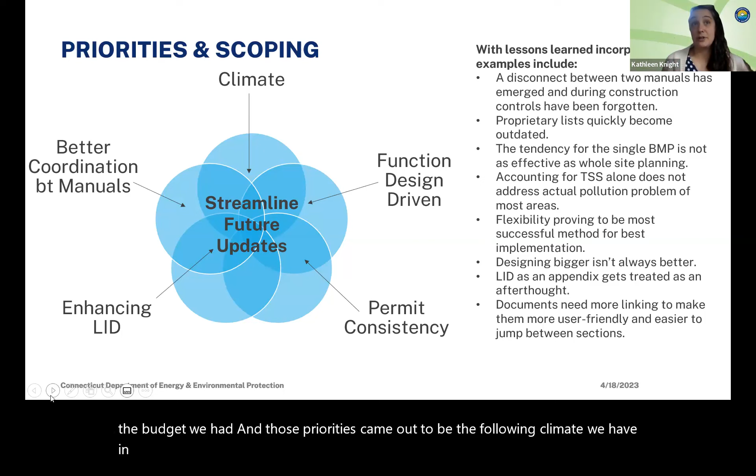Climate. We have it twofold. We have observed climate change since the numbers that were in the manuals, which were from as far back as the 70s, and the values now are very different.

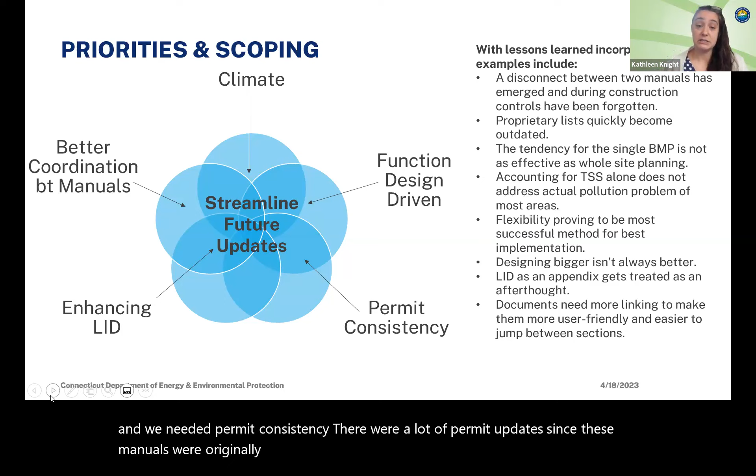Rather than highlight primary and secondary BMPs, we really wanted a function-driven focus. And we needed permit consistency. There were a lot of permit updates since these manuals were originally written that needed to be brought up to date in these guidance documents.

We also wanted to enhance LID. This is a requirement of the permits and also just a very good, useful practice. And it was kind of an afterthought as an appendix.

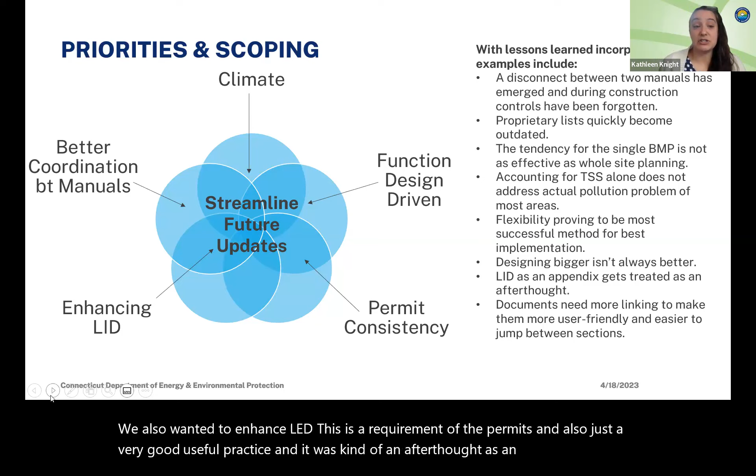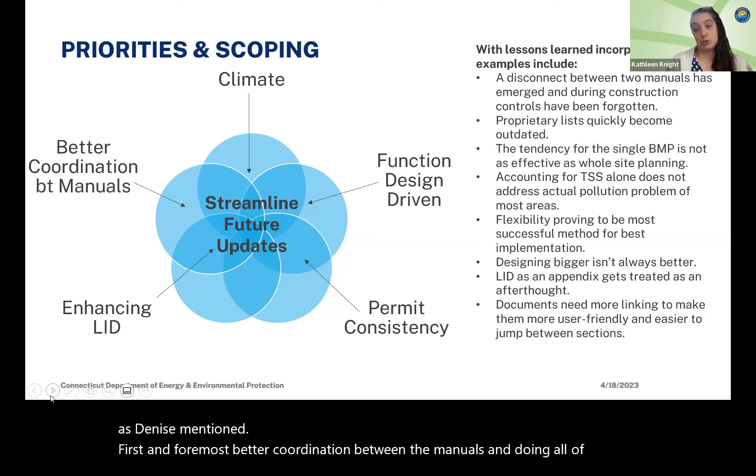And then, as Denise mentioned, first and foremost, better coordination between the manuals. And doing all of these priorities in a way that streamlined future updates. We didn't want to produce something that was an exhaustive list that took forever to put together and then immediately was outdated. We wanted to provide longevity to the manual, and by doing so, bring flexibility in design.

So that way you could always incorporate the newest science and the newest technologies. And we didn't want to lose sight of where these priorities came from, and that came from this kind of summarized list of our lessons learned. As Denise said, there was a disconnect, and we had started to see some forgetting of during-construction controls. There was a lot of concern about proprietary lists. They get really quickly outdated.

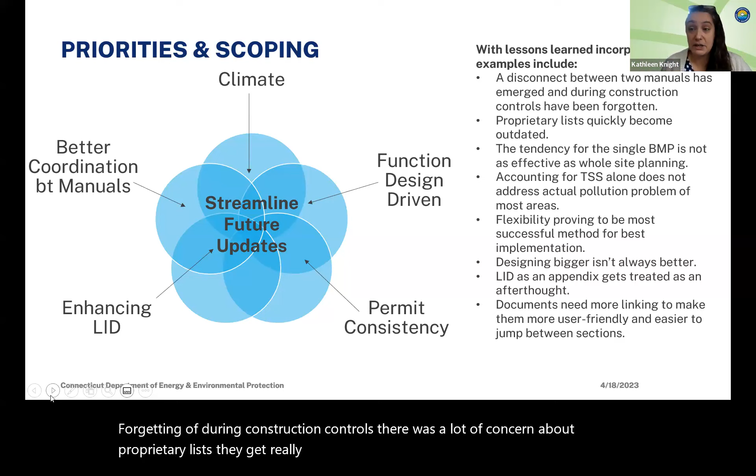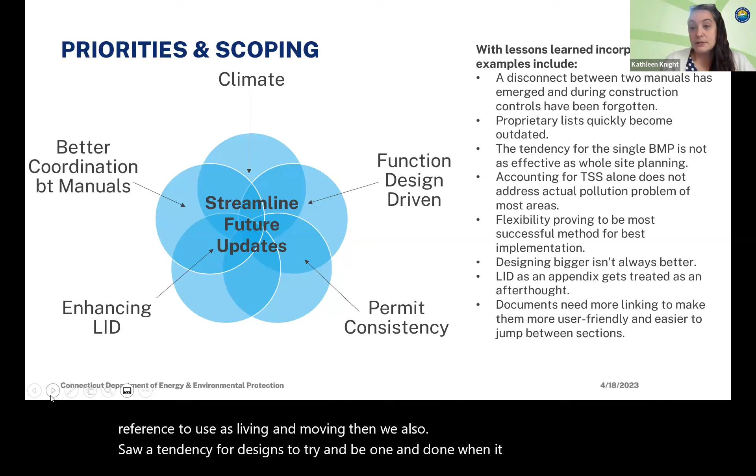So we're not going to manage one of those. We're just going to take the function and what serves best, and we've provided some links to those sources that do routinely update these kind of lists. That way you have a reference to use that's living and moving. Then we also saw a tendency for designs to try and be one-and-done when it didn't really suit the site, so we were trying to refocus the design process as whole site health.

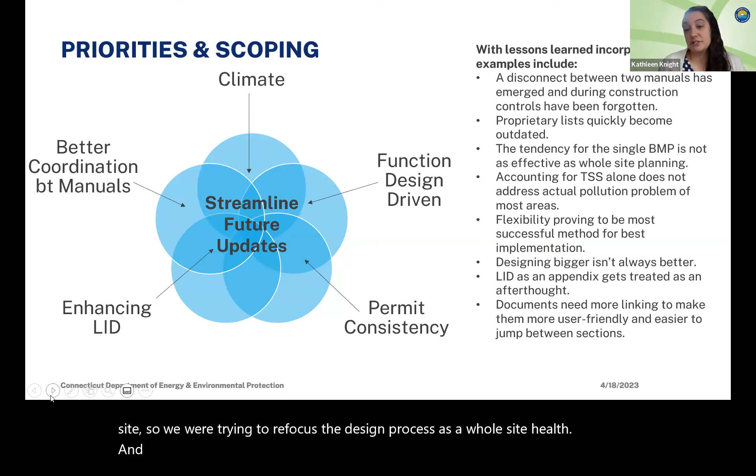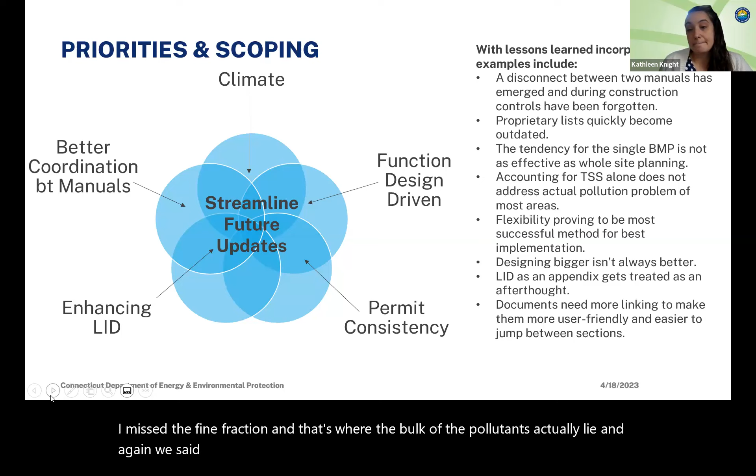And another issue that we learned is accounting for TSS alone missed the fine fraction, and that's where the bulk of the pollutants actually lie. And again, we said flexibility. We were finding more successful implementation when there was more flexibility allowed.

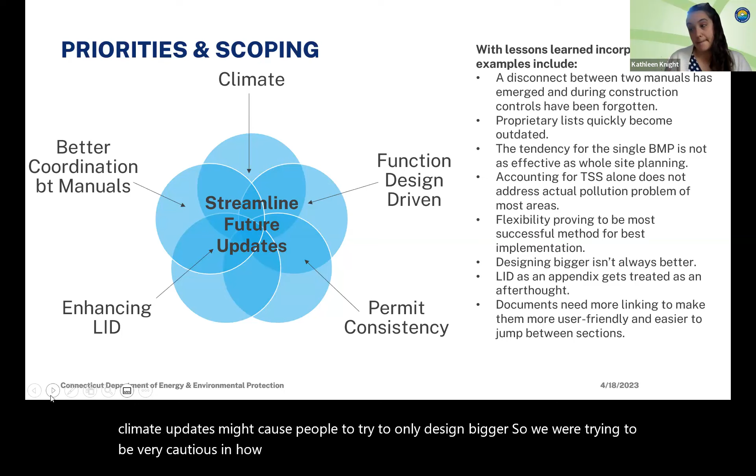There's also concern, as we went through this, that designing bigger isn't always better, and climate updates might cause people to try to only design bigger. So we were trying to be very cautious in how we outlined the process and where you could adjust your plan to make sure you weren't just going giant to account for additional rainfall. And then again, as I mentioned, LID shouldn't be an afterthought, it should be at the forefront.

And the documents themselves needed to be a little bit user-friendly since we're much more in an electronic world. If they could easily click to sections and documents and pieces, that was going to provide us with a lot of benefit.

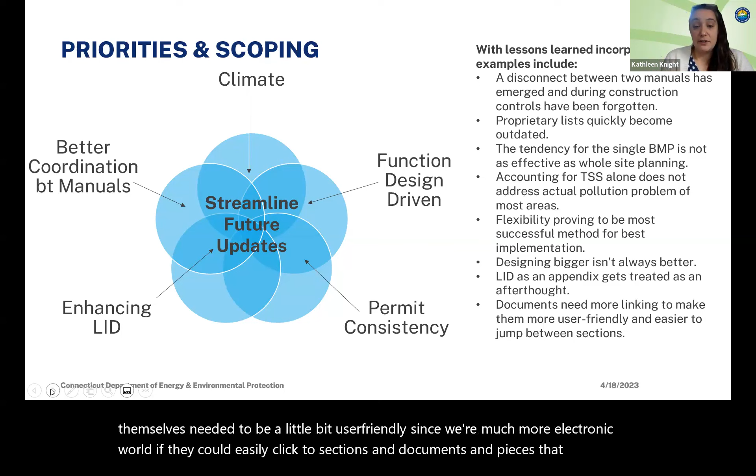So when we downloaded all this data dump for the contractor, specifically Eric Moss and Dean Audette were kind of the leads on this project. They came back with us with specific recommendations on how they could resolve those issues and implement them. You'll see that the categories are highlighted here, and it goes into a lot more detail than this, but I didn't want to spend all day on this for you.

So once we received those recommendations, we brought it back to the work group. We held one or two meetings, I forget if it was two. I think we ended at the second one for discussing how to land on some of the recommendations. And this slide kind of gives you the category and then where we landed on the right with that verbal feedback. And then we circulated a Microsoft form to give us a voting forum of sorts.

And for current climate change, what we've seen since the last manual, we decided to rely on NOAA's latest data. We're not the experts in the meteorology, they are, so to link directly there was most useful.

Climate change with regards to how it might change in the future, that's something we wanted to consider. The infrastructure that we set up for stormwater has a lifespan that will see additional change, but the options introduced a lot of uncertainty, so it's more of a conceptual guidance that we've given with regards to that.

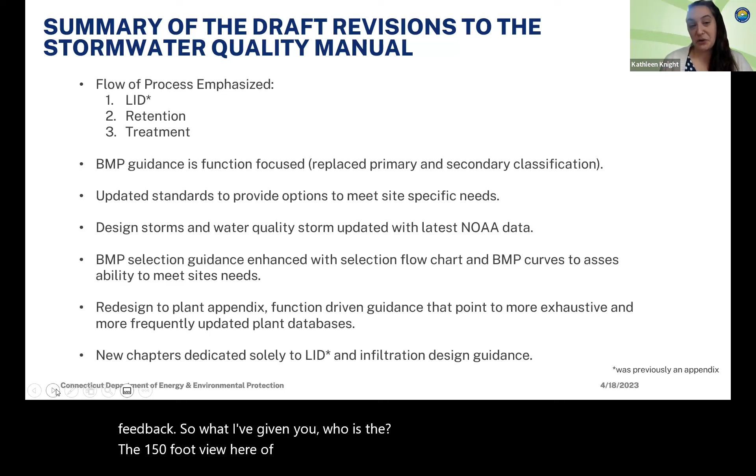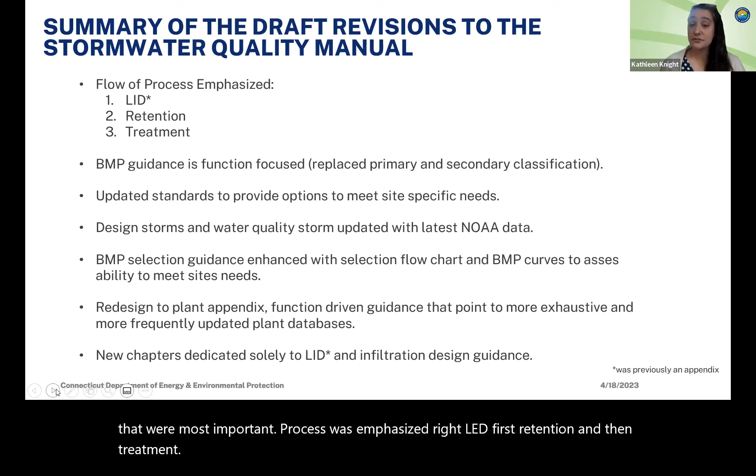Process was emphasized, right? LID first, retention, and then treatment. The BMP guidance was function focused. We got rid of primary and secondary. And then we updated standards to meet site-specific needs and provide you options, right?

And then the BMP selection guidance was enhanced with two key aspects. We have for the structural piece, we have a selection flow chart, and then we have the BMP curves to assess what pollutant reductions could meet your site's needs.

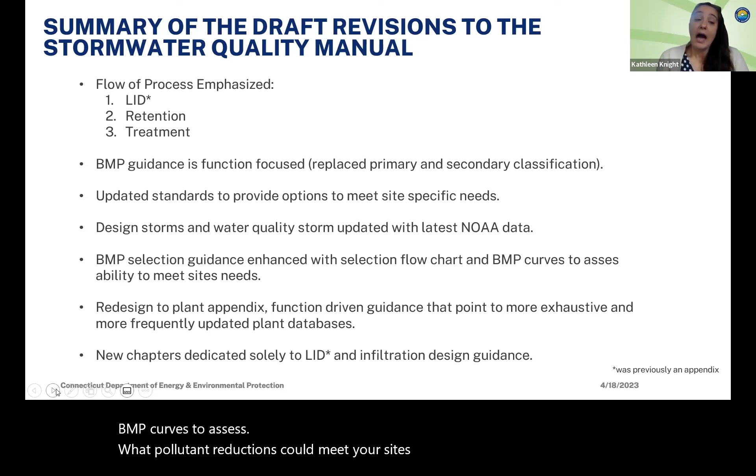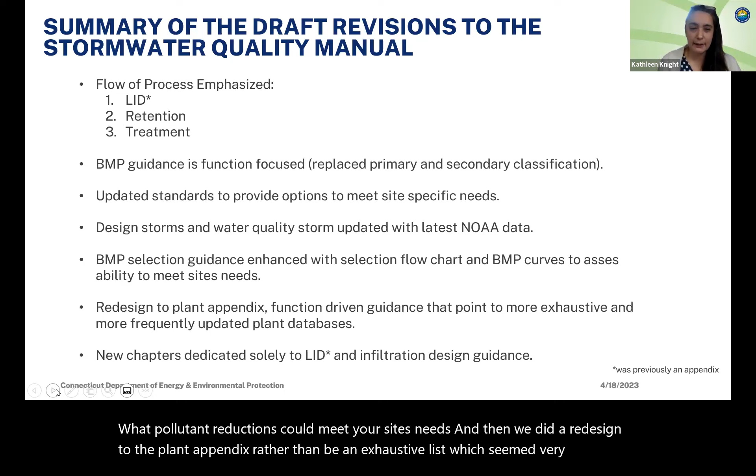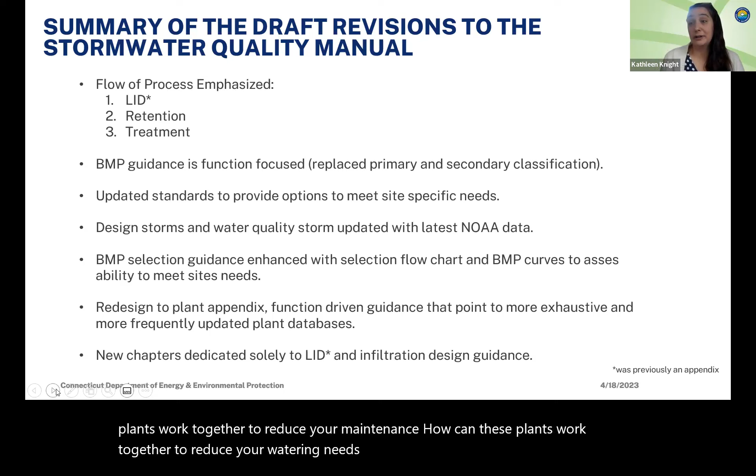And then we did a redesign to the plant appendix. Rather than be an exhaustive list, which seemed very finite and limiting in a way, we went for more of a function-driven guidance. How can these plants work together to reduce your maintenance? How can these plants work together to reduce your watering needs? Or what are good companion planting options? And what are good resources for those exhaustive lists, right? The USDA plant database, that's an ideal one.

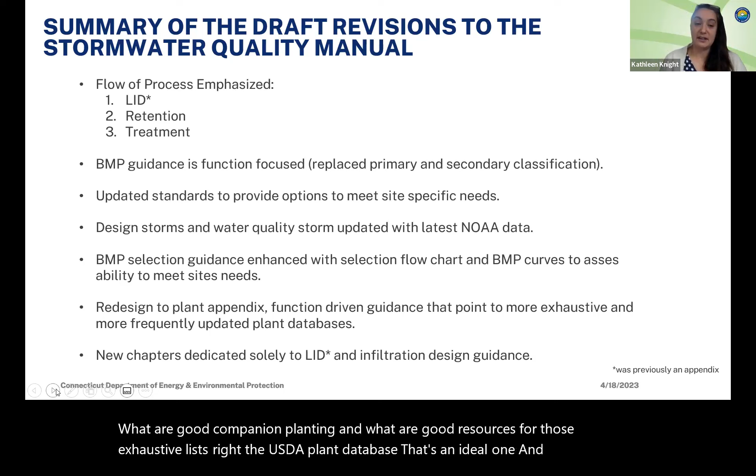And then, of course, like I've said 100 times, we have new chapters dedicated solely to LID, and one dedicated to infiltration guidance, since that is the gold star of structural.

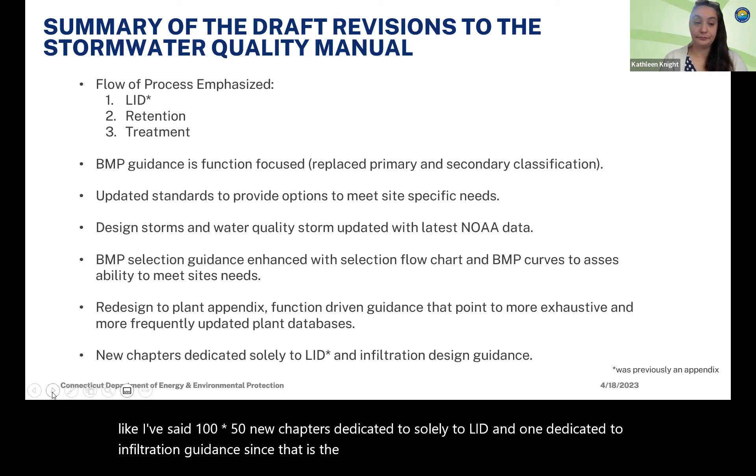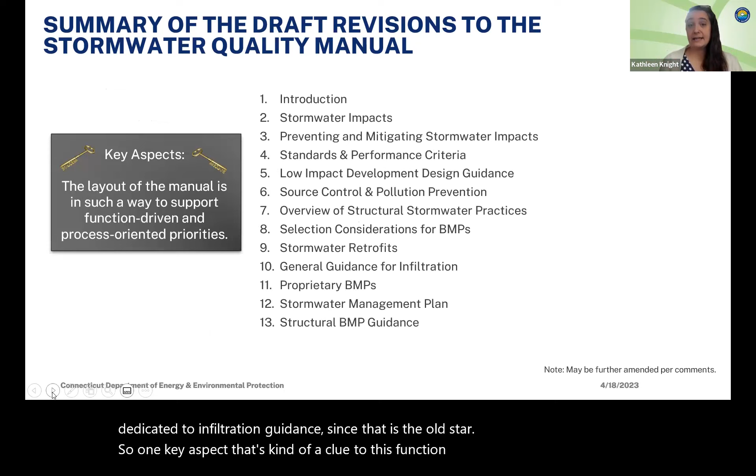So one key aspect, it's kind of a clue—this function focused process is the layout. The layout of the manual was redone to facilitate that thinking. We back up with the basics in the first few chapters so you can do that site assessment. Where are my attributes on this site? Is there a wetland that's high value? Is there a buffer that's high value? Avoiding impacts and preserving those high quality pieces.

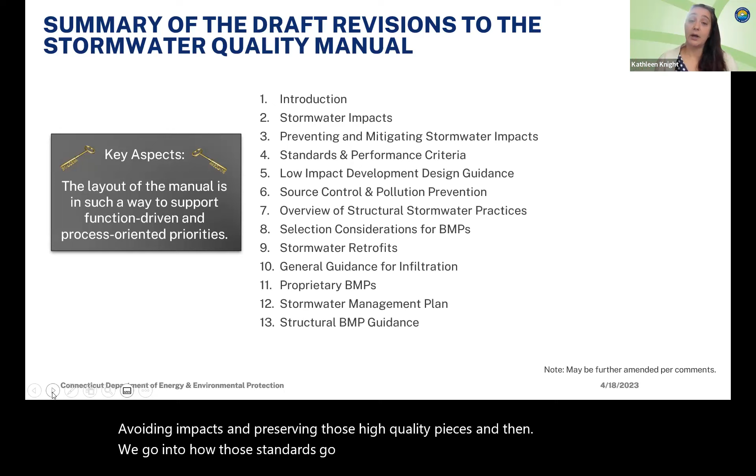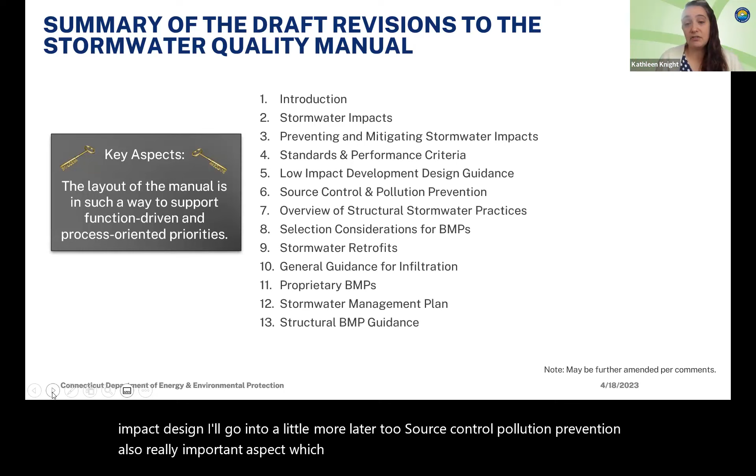And then we go into how those standards go through, which I'll go into more later. Low impact design, I'll go into a little more later too. Source control, pollution prevention, also a really important aspect, which I'll give you a little sneak peek of. And then overview of storm. And then chapters 7 through 13, we're really talking about the structural pieces. And there is design guidance in chapter 13.

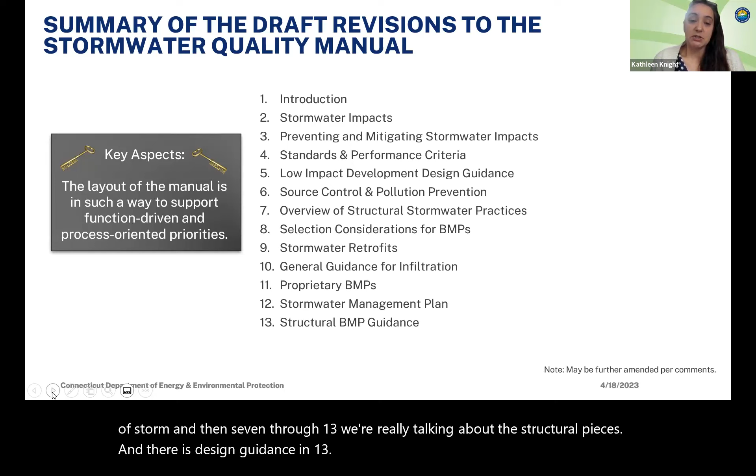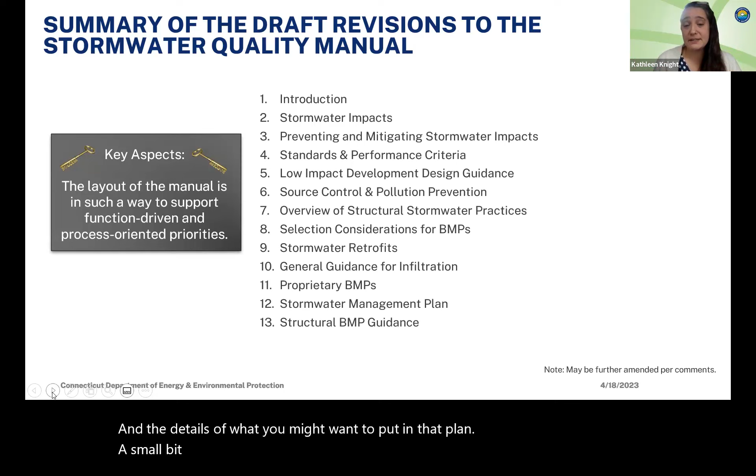Stormwater management plan details, which tells you how to bring all these pieces together and the details of what you might want to put in that plan. A small bit on proprietary BMPs—we didn't want to totally exclude it so that someone would infer they're not allowed. They are allowed. It's just a matter of we're not saying only this list.

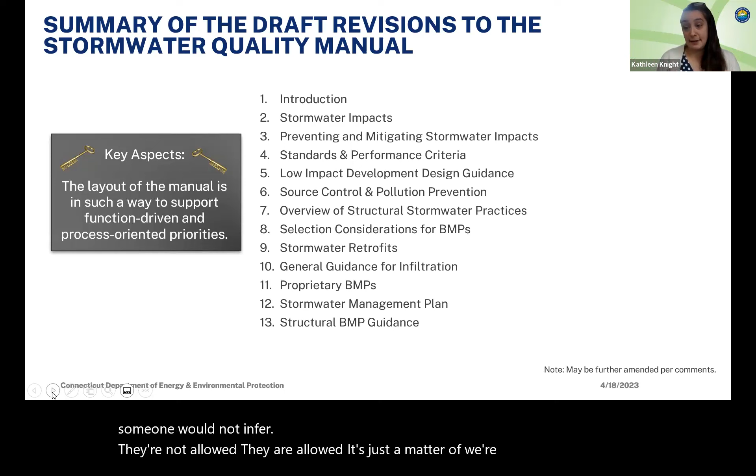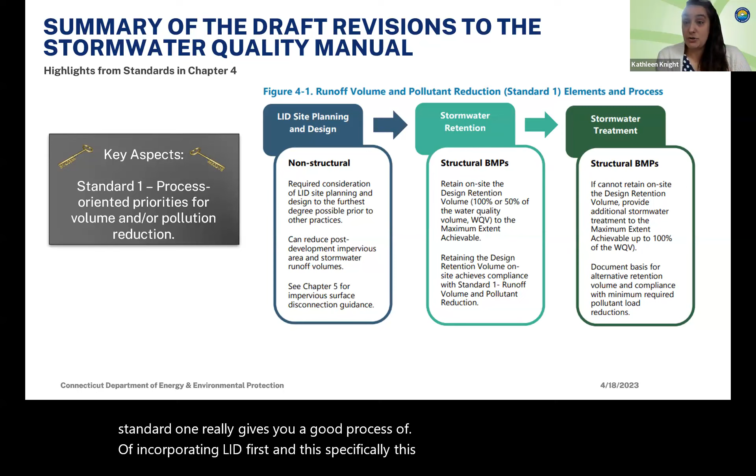So as I said, one of the pieces we really went into was this process-oriented approach, and standard 1 really gives you a good process of incorporating LID first. This specifically is referencing non-structural LID. That doesn't mean structural LID is not allowed, it's just not your first line of defense here. It's in the structural pieces. You really want to look at these non-structural aspects first.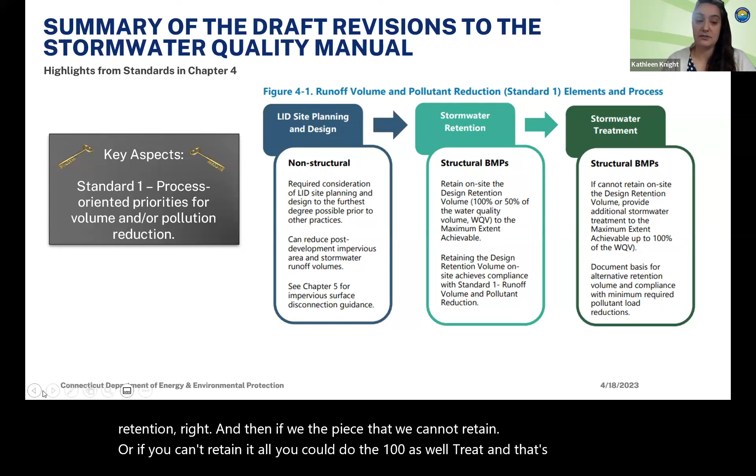And then we want to do stormwater retention, right? And then for the pieces that we cannot retain, or if you can't retain at all, you could do the 100% treat approach. And that's where those BMP curves come in helpful to help you assess what treatment you're getting.

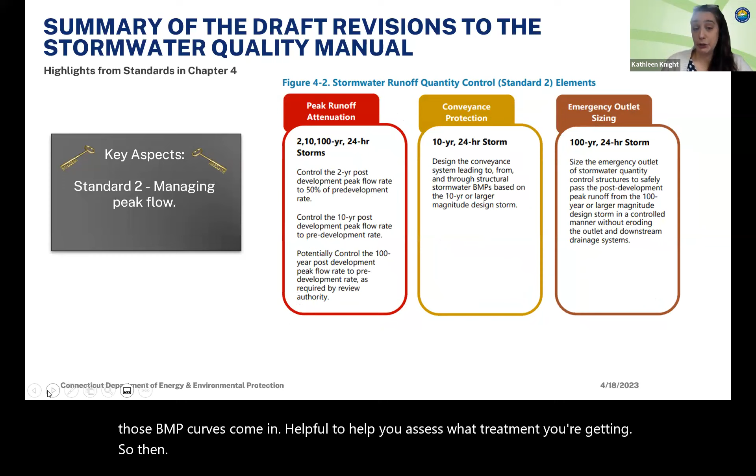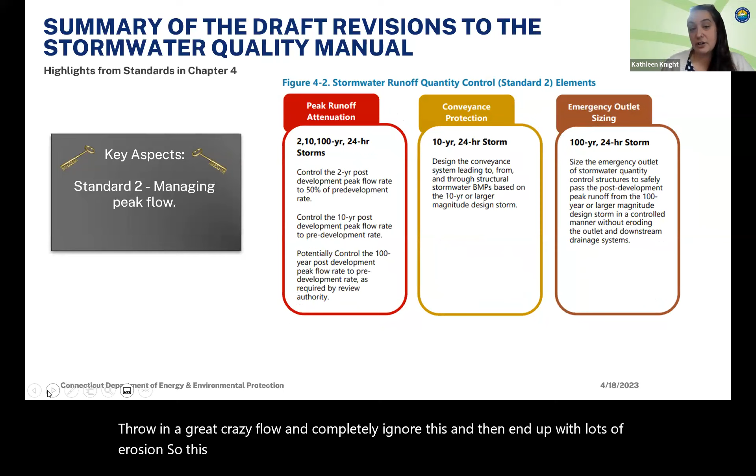So then standard 2 is managing that peak flow, right? You do not want to throw in a crazy flow and completely ignore this and then end up with lots of erosion. So this is in 3 pieces: peak runoff attenuation, conveyance protection, and the emergency outlet sizing.

Standard 3, oh did I say standard 3 before? I'm sorry about that if I did. Standard 3 is that critical link that we were talking about. We needed to make better connection. This is going back to that, the guidelines, what I call the SESC. You must have a plan for during construction for erosion control, and that's basically the link back there.

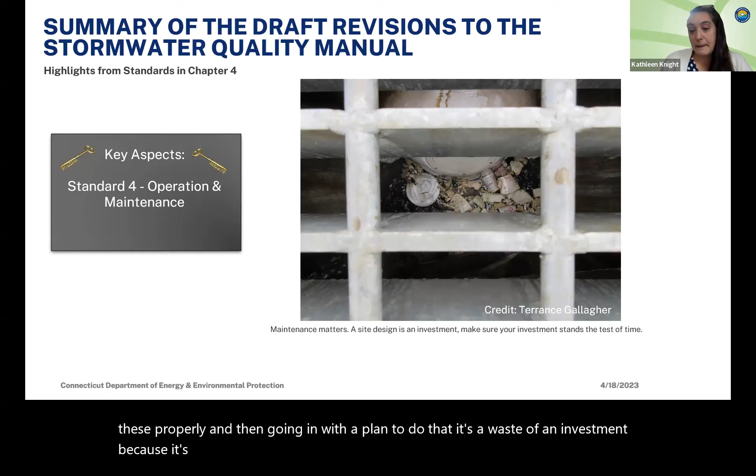Another key aspect is standard 4, operation and maintenance. These are an investment, right? And if you're not maintaining these and operating these properly, and going in with a plan to do that, it's a waste of an investment because it's not going to operate or function the way that it's intended.

So standard 5 is the plan, the stormwater management plan, and it really brings all these pieces together. And that standard is really described in further detail in chapter 12, so you can get exactly what kind of site designs and what kind of site maps you want to look for, and those kind of things.

So as I said, chapter 5 is where we really talk about LID now, specifically non-structural LID. We want to avoid, reduce, and manage. Evaluate your constraints and your opportunities. That's key, right? We want least disturbance, that's really our overall goal. And where we have assets, we really want to preserve those assets for stormwater.

And then chapter 6, we go into more details about source control and pollution prevention. This table is one of the ones that was a primary focus in the update, and it gives you the practice type, where it's applicable with these raindrops, and then some, what we're calling minimum requirements there, to make it effective, what you really need to consider and what you need to do. And then there's additional resources in the far right link.

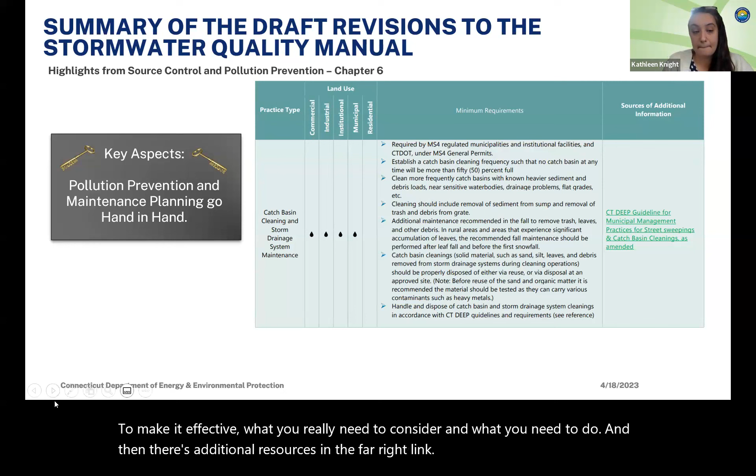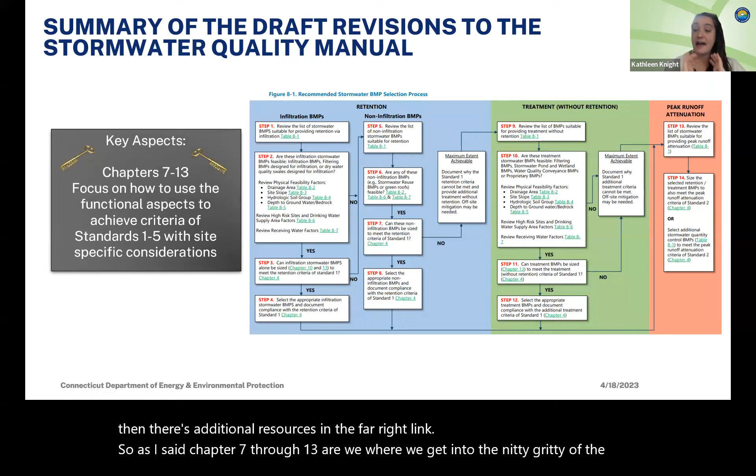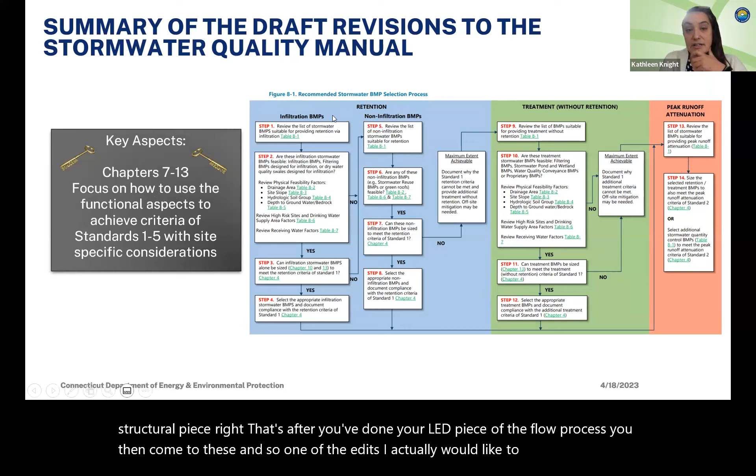So as I said, chapters 7 through 13 are where we get into the nitty-gritty of the structural piece, right? That's after you've done your LID piece of the flow process, you then come to these. And so one of the edits I would actually like to make to this, that we're recommending, is somehow putting a piece up front so that you could link back to that, so that should you automatically jump to this, you don't forget to go back to do that piece.

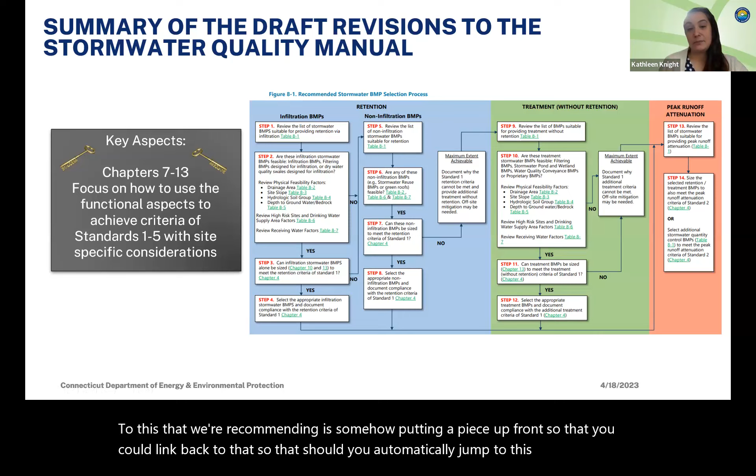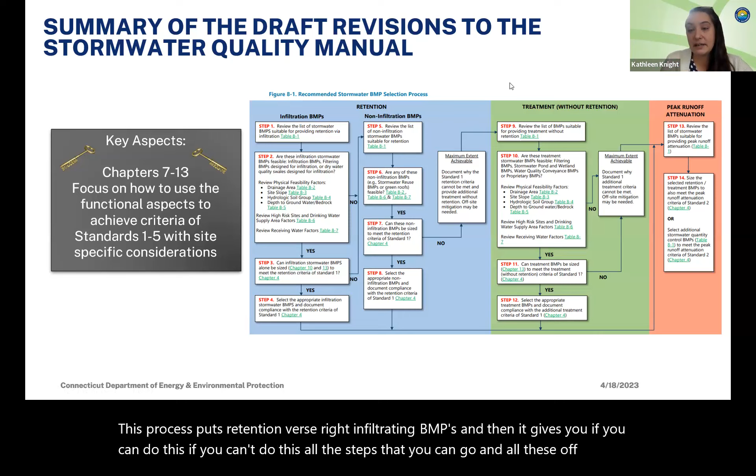And this process puts retention first, right? Infiltrating BMPs, and then it gives you, if you can do this, if you can't do this, all the steps that you can go and all these off-ramps you can do. And then we go to treatment without retention, and then you address peak runoff attenuation.

So on to the guidelines on soil erosion and sediment control. Similarly, the chapter outline is a really big key and clue to how we want the consideration of the flow and the process to go. Unlike the stormwater quality manual though, this was already really set up like that, so this manual didn't get the same kind of rehaul that we saw in the other one.

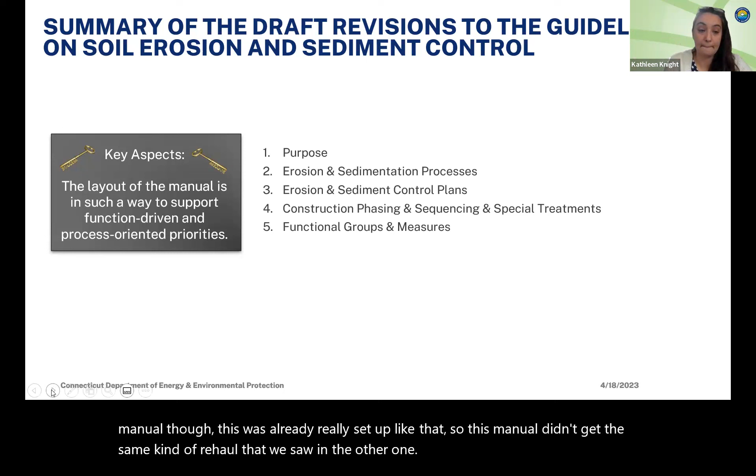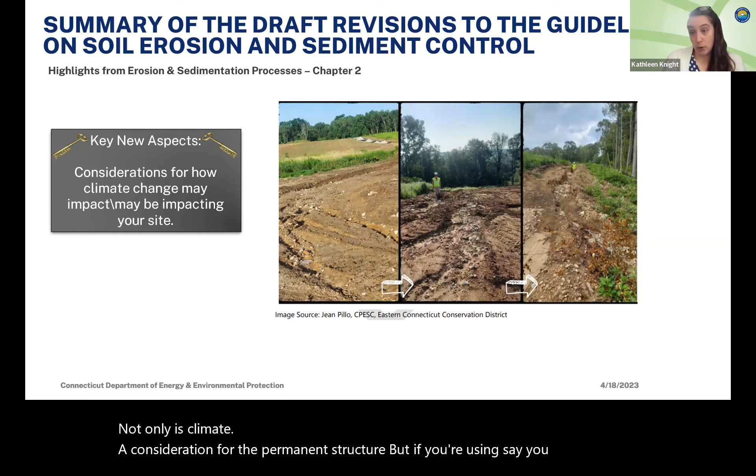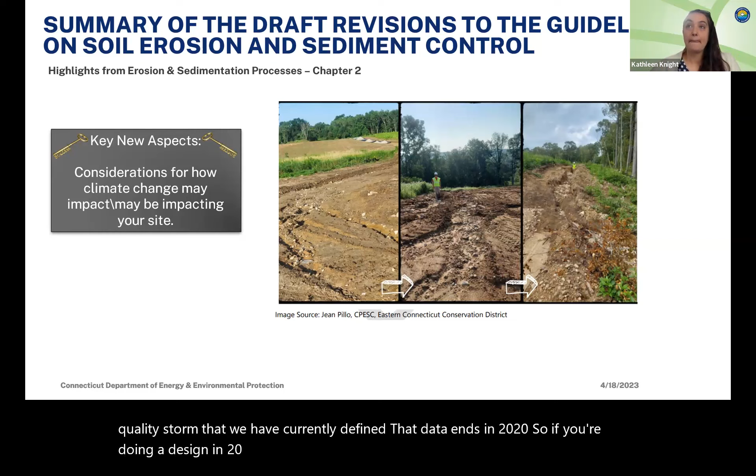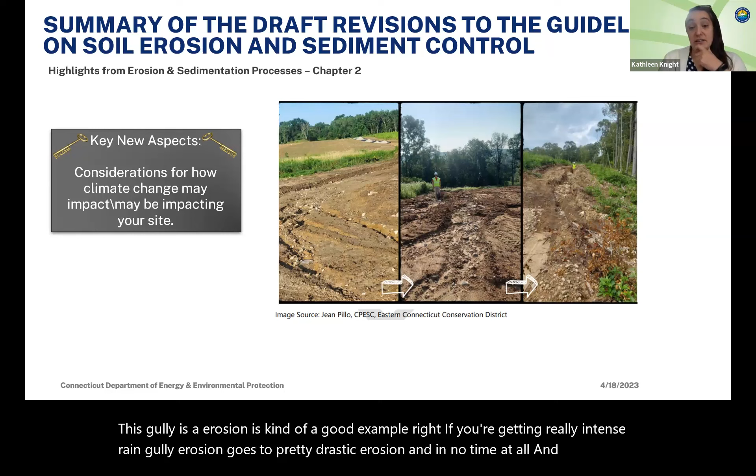Again, thank you Jean. One key new aspect of chapter 2 is climate considerations. Not only is climate a consideration for the permanent structure, but if you're using, say, the water quality storm that we have currently defined, that data ends in 2020. So if you're doing a design in 2025, it's an aspect you might want to consider, because this gully erosion is kind of a good example, right? If you're getting really intense rain, gully erosion goes to pretty drastic erosion in no time at all, and you have less time to correct if you're not properly planning.

So chapter 3 highlights from the control plans. We like the keep it simple, silly acronym. If your site is simple, go simple. The more complex considerations are kind of highlighted in our plan as well. And LID is also an important aspect.

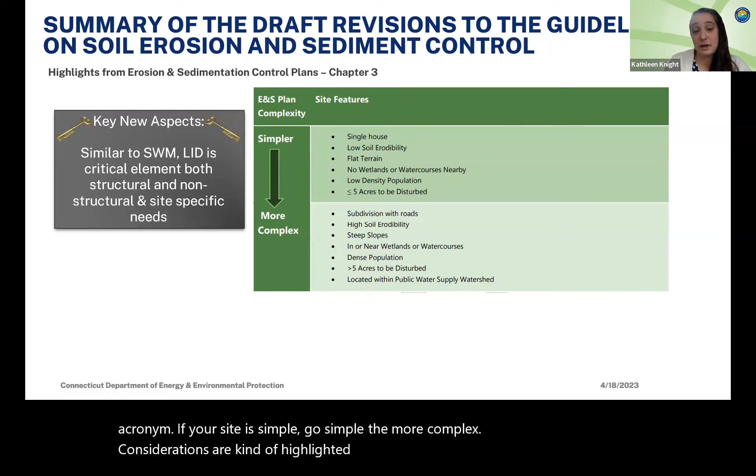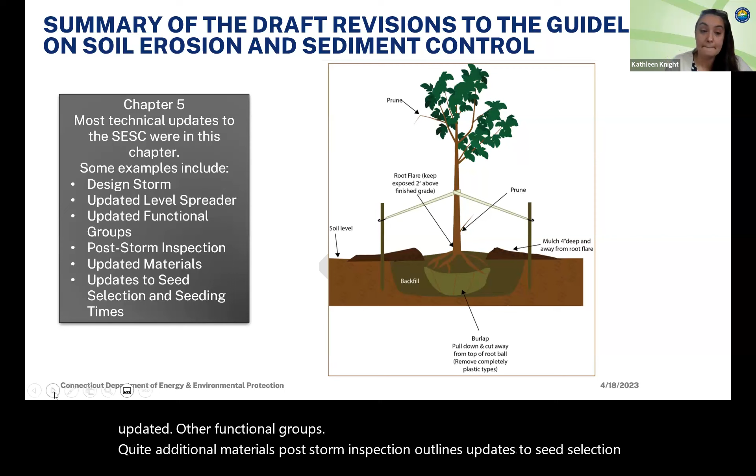But the bigger updates are design storms again, climate, updated level spreader, updated other functional groups, we've got additional materials, post-storm inspection outlines, updates to seed selection and seeding times. And that kind of gives you the highlights of those two manuals as they currently exist. Again, we are in the midst of evaluating options. I provided some options for the contractor to review, and then we're going to take it back to the team and start collecting information on, just in case there's hiccups that I can't foresee if I pivot in a certain way.

We feel we were pretty successful in outreach for the comment period. We received over 110 comments. Some of these I grouped together because they were very similar, so they're not counted individually. There were 166 participants on the webinar, so if you attended, thank you very much. The comments were incredibly helpful. Since it wasn't a required comment period, we saw it as more of an extension of our work group that we couldn't feasibly tackle. So the process was a success in that regard.

Some of the things that we learned, obviously 110 comments are hard to summarize, but we needed clarity regarding the intent of the BMP curves and the simplified method that we're implementing versus some of the methods that are out there that may be causing confusion. We realized we needed clarity with regards to the water quality volume versus the water quality storm. The updated 90th percentile is the water quality storm that goes into the water quality volume equation. Then we may need some additional documentation for calculating the water quality storm. We're not sure how relevant that will be for people, but we're looking into that as well.

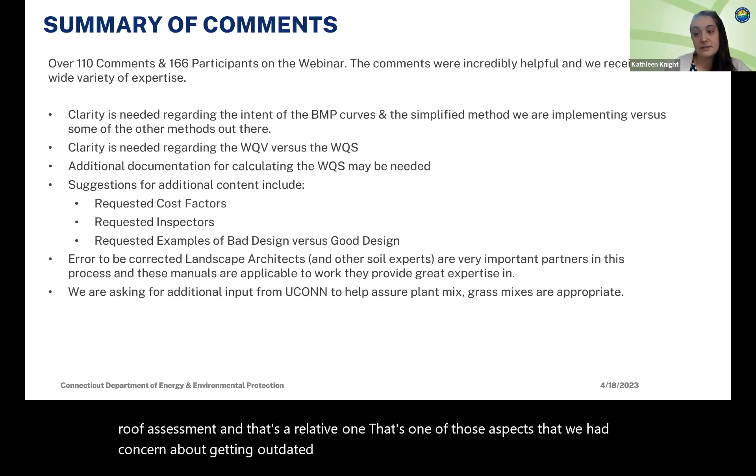Suggestions for additional content were pretty impressive as well. We got requests to look at cost factors a little more. We only really included that in the green roof assessment, and that's a relative one. That's one of those aspects that we had concern about getting outdated really fast and absorbing a huge portion of the budget that would have had to sacrifice these other elements you see here today. But it's not something we've forgotten about. There are other tools that happen to relate that I'm working on in other projects, which I can give you as much as I can if you would like me to regarding that.

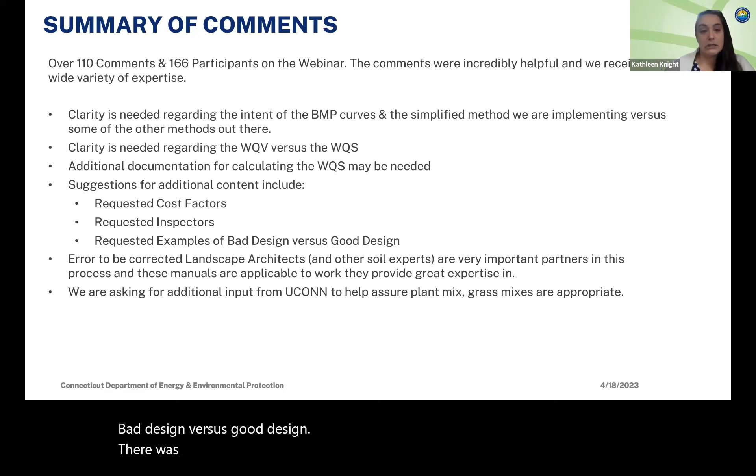And then we heard requests for more inspectors for enforcing the maintenance piece and enforcing the follow through on the good design. We were requested to hear and see bad design versus good design. There was an error that needed to be corrected. Landscape architects and other soil experts are very important partners in this process, and these manuals are applicable to the work that they provide great expertise in. And this reference has been fixed. And then we're also asking for additional input from UConn to help assure the grass mixes are appropriate. That was one aspect I think I would like additional eyes on.

So our next steps before we go into questions, we are, as I said, kind of in the pre-outreach. So that's today. Thank you, Jean, for kicking that off for us. We have a couple more webinars coming up that were requested through various forums. We plan to update the public fairly soon to let them know we appreciate the comments. We've collected them, and now we're in the contemplation phase. And at the same time, as I mentioned, F&O is giving us some support to make sure I'm not altering their vision too much on some of the ways they've really refined and did a lot of work to make this a success. And I don't want to undo any of that. And then the team here today, who I will introduce you to shortly, we're gonna come to the table and brainstorm it out and make sure we're doing what we need to do.